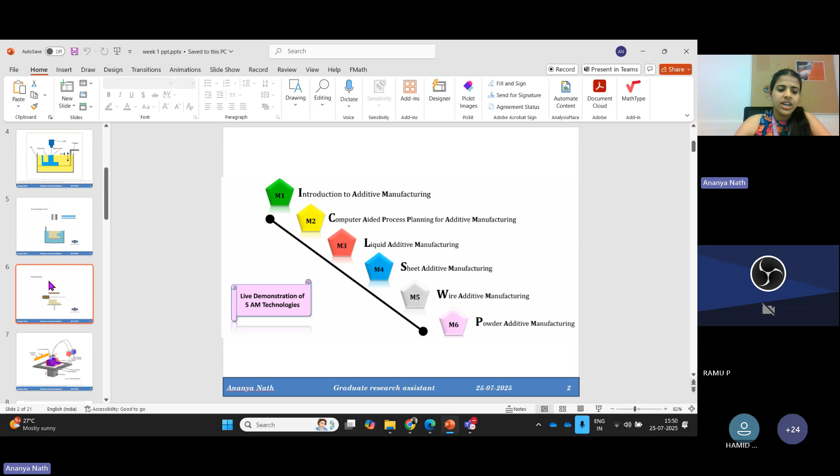The way these processes are arranged is based on the energy consumed by the process. That means vat photopolymerization takes the least energy, and directed energy deposition takes the highest energy.

Now comes the pre-processing part. Pre-processing means making the CAD model. But this doesn't mean you can just use a CAD software like CATIA, SolidWorks, or Fusion 360 to make the model and print it directly. It's never like that. If you want to use vat photopolymerization, you have to think from its own perspective. If you want to use powder bed fusion, you have to think from that perspective. So the CAD modeling approach also depends on these processes.

Because when we 3D print, we print on a base. It's basically like how birds make their own house. They find straw as raw material, bricks, dried leaves, and everything, and put it all together in a small part of a tree branch to make the house.

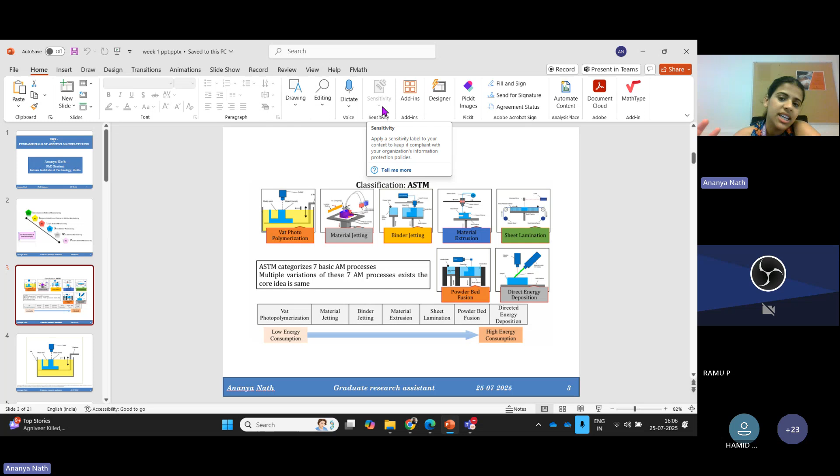Because these 7 different ASTM state-of-the-art processes have different applications, like material jetting, binder jetting, powder bed fusion, and material extrusion. Material jetting and material extrusion can both give you plastic parts. But if you compare the cost of the machines—just taking some constant for comparison—material jetting machines will be much, much higher costly than material extrusion machines.

And material jetting can also give you a very, very accurate part. I think material jetting is one of the top accuracy printing processes—no other additive manufacturing process can give you that level of surface finish. But you cannot go for material jetting for everything. This process is not capable of printing much in metal parts. Material jetting is not known for metal printing; it can print plastic only.

So if you have a very intricate geometry and a very critical application, you should go for material jetting. But if you have a plastic model which needs good accuracy, but its application is not that critical—it doesn't need few-nanometer accuracy or something—you should go for material extrusion. You can save half of the cost. So this is how it works.

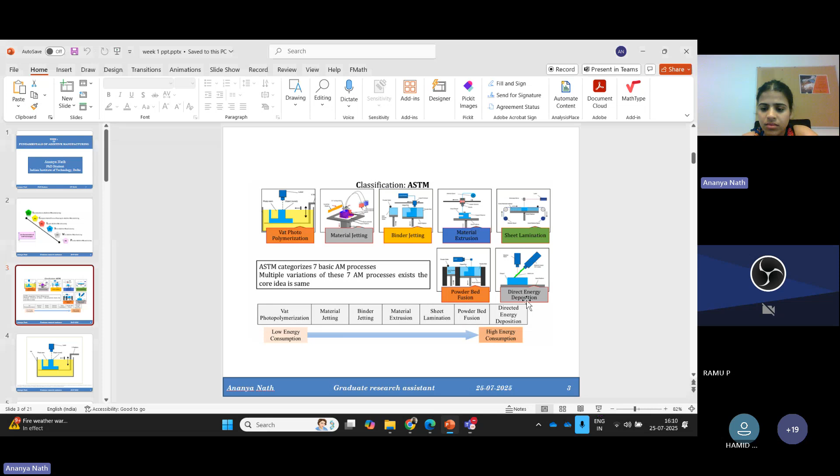So this is VAT photopolymerization. In this process, remember that every state of the art includes some sub-processes. The state of the art name is VAT photopolymerization, but under it there are multiple processes. For example, DLP, digital light processing, then there is SLA, stereolithography. There are other processes too which I don't remember right now, but under the state of the art of VAT photopolymerization there are different processes, and each uses different processing, but they all come under the same umbrella.

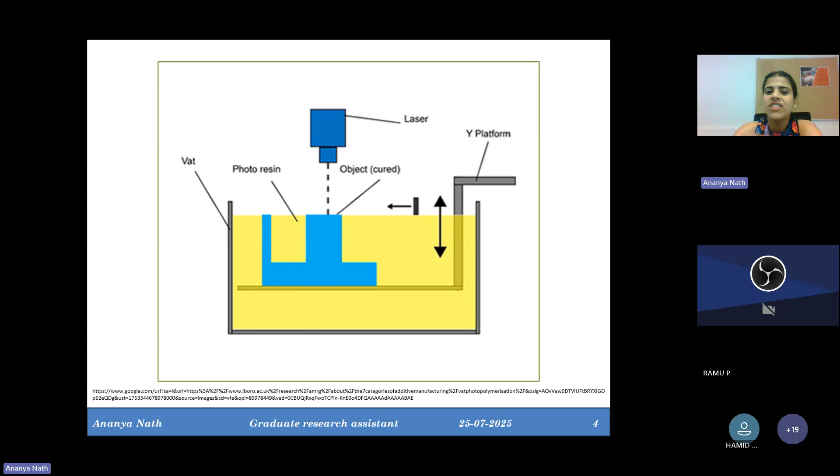In this photo, there is a build plate. On the build plate, this part has got made. This is the resin. So basically, if you see, this is an SLA process. This is a blade kind of thing, which is spreading the resin layer on top. And from here, the laser is coming. The laser, or the UV light, is basically curing the resin.

See, it went down. The build plate went down. The layer was spread. Now the light is coming to photopolymerize the resin present over there. So basically, when you put UV light on the photocurable resin, the monomers start reacting. They start making big chain polymers, and this is how the resin gets solidified. The resin is a thermoset polymer, so once it is solidified, it cannot be melted again.

So using this process, people use the physics of stereolithography to print resin parts. Now resin can be of different colors, and they will be cured at different wavelengths of UV. So this process can be done by laser or UV light. For laser it's different, for UV light it's different. For laser also, laser will have different wavelengths because it's light, and UV light will also have different wavelengths.

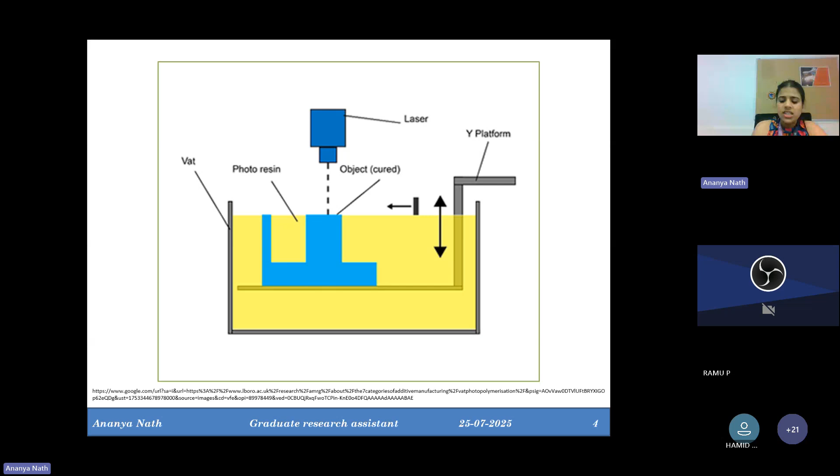Now this process can be reversible. The build plate can be mounted like this, and it can be dipped inside resin, like there is a vat of resin. This is also the same process, but there can be a vat of resin. The build plate can start curing from the bottom, so in that case the light will be given from the bottom. This UV light is put on the resin, and it will be solidified, this layer.

Then the build plate will move up by one layer. The resin will come, and the UV light will cure the resin present. Then the build plate again will move by one layer height, and the resin will be solidified like this. So when you get the build plate, the process is basically inverted upside down, but the product will be printed not upside down, in its original way only. So this is another process.

So SLA, DLP, these are different processes coming under the umbrella of VAT photopolymerization. This is used for plastic printing only. Previously it used to be used for thermosetting polymers like resins only, but these days people are trying to use thermoplastic polymers as well. Thermoplastic polymers mean when you're solidifying the polymer, you can remelt it and resolidify it again. So there comes a different process physics, but people are trying to use thermoplastics as well.

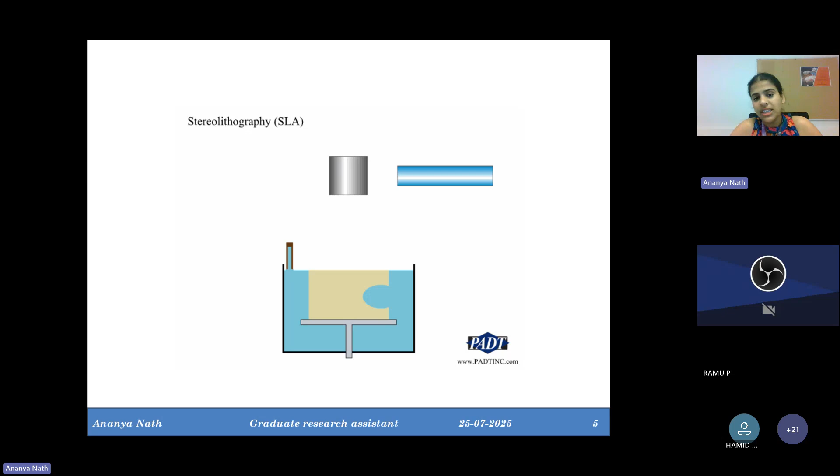Next process. If you have any doubt, you can raise your hand in between and ask. Do you have any doubt? No? Good. So this is another process which comes under VAT photopolymerization.

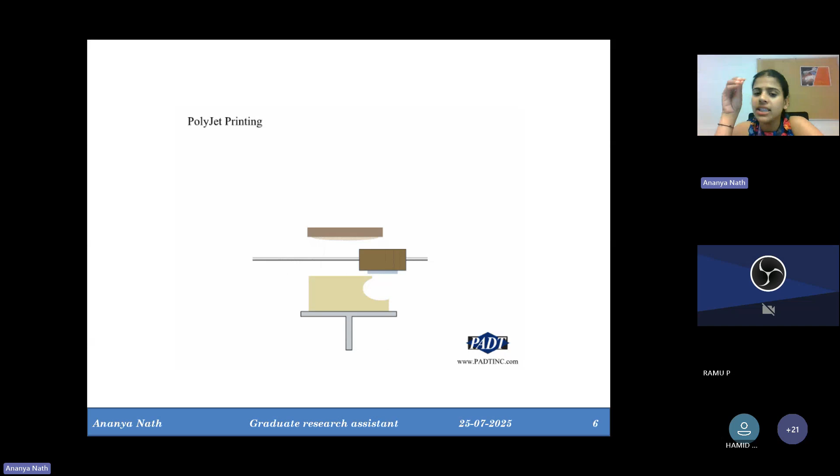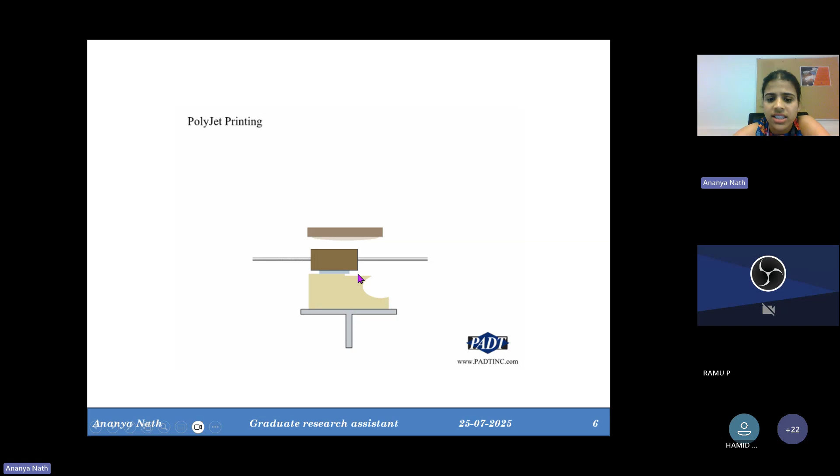This is polyjet printing. The head has some nozzles connected to the supplier, from which liquid resin comes. These nozzles spread the liquid onto the part, and from the top of the head there is UV light or laser light which cures this top layer of liquid resin.

In this process, the part is not dipped inside resin, so the washing process after printing will be a little bit easier.

Next comes material jetting process. So here I have shown— is somebody trying to talk? It's fine, it's fine. Okay, this is material jetting process.

Material jetting process also uses liquid material as raw material. It will be polymers again—mostly thermosetting polymers, but thermoplastic polymers as well. So both types of polymers you can use.

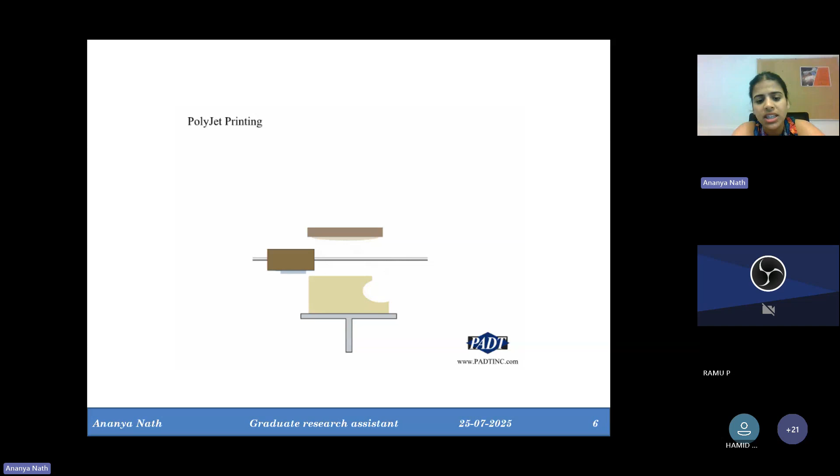This built material can be multiple colors. In VAT photopolymerization, if you're working with the polyjet technique, you can print multiple materials because there are multiple nozzles in the head. But if you're working with stereolithography, it's difficult to print multiple materials. So there comes material jetting.

It gives a great finish to the parts. It basically has a nozzle, and from the nozzle, drop by drop, the part material comes out and gets dropped on the build plate. Drop by drop, you fuse the liquid plastic droplets together and they make the track, they make the layer, they make the 3D geometry by layering. This is a very simple process.

You feed the material in liquid form only, and for each layer's solidification you can use a UV lamp. There is something called a leveling blade. So basically, after spreading one layer of liquid on top, you can level it with the blade so that your part will not be inclined in any part due to liquid surface tension and viscosity.

So this is the process. A UV lamp will be used to cure it, but not always—there can be a metal jetting process where the liquid gets solidified by itself, without any UV lamp, though you can use one as well. It depends upon the process, since under material jetting there are multiple processes, and also upon the raw material you are using.

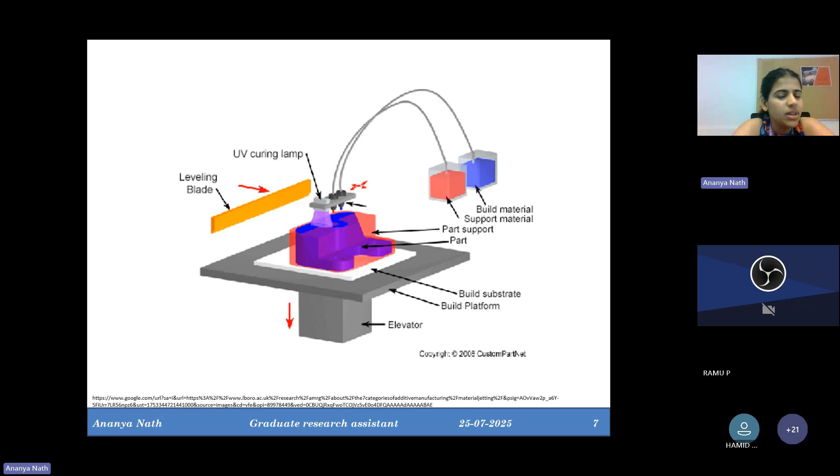So these are the things. If you are using a polymer build plate, there can be bonding of the layer at the polymer build plate. In that case, you have to cut the part after printing. So then it's better to use the metal build plate, so you can reuse the build plate again and again. It's not like one time use. So this is the process.

Then we have binder jetting. In material jetting, we are putting the material, and the material is coming out of the nozzle. In binder jetting, we use the roller.

We use powder as raw material, and a powder roller to put the powder on the build plate. So basically the powder, if this is my build plate, this is my powder roller. It can be roller, it can be blade as well. It will be used to spread the powder on the build plate. And from the nozzle, which will be on top of the build plate, the binder particles will come.

Binder can be liquid, so this liquid binder will come and put the droplet on the area where you are interested to print your part. When the liquid droplet is put on it, the powder particles will fuse together, and then you can put additional heat to it. You can again put the roller on it to just press the part again so that the adhesion will be better and the part density will be better. So this is the process of binder jetting.

Material jetting, then binder jetting, then comes the material extrusion. In material extrusion, one process is called FDM. You carefully look at this process.

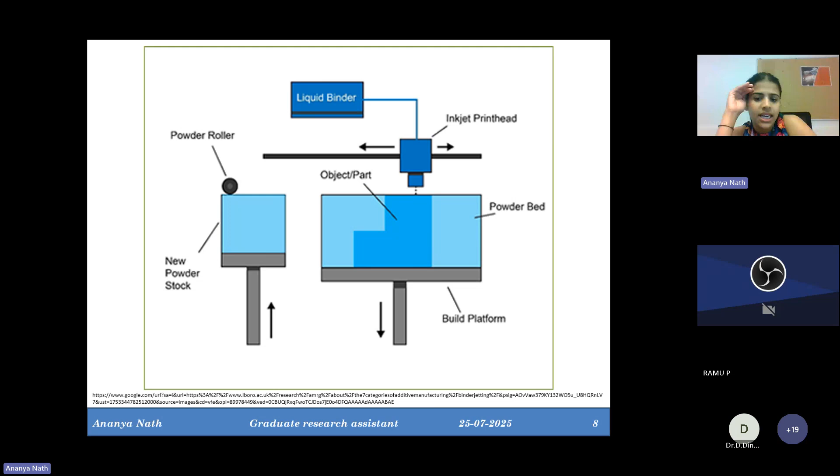So in the previous slide, and in this slide also, there is something called support material. Know what it is? When you make the 3D printed geometry, compared to casting, you make a mold in casting. And in the mold, you put the liquid metal. So wherever there is space, the liquid metal will try to flow inside and fill it. So that's the process.

In 3D printing, this is my build plate, and from the nozzle, material comes out and prints things. Now if I want to print this geometry, it has a lower curve, then a line, then an upper curve, then a small line. There is material in this part and no material in this part.

If I want to print it like this, don't you feel that when printing, there's supposed to be some material, otherwise this part will fall down? So if I'm printing this part on top of the build plate, obviously it will fall down if I don't put anything there.

Just like how bridges work. If you're putting a bridge on a road or over a river, you don't leave it unconnected. You put some columns in the bridge from the river as well, just to support the bridge. Otherwise, the bridge will fall.

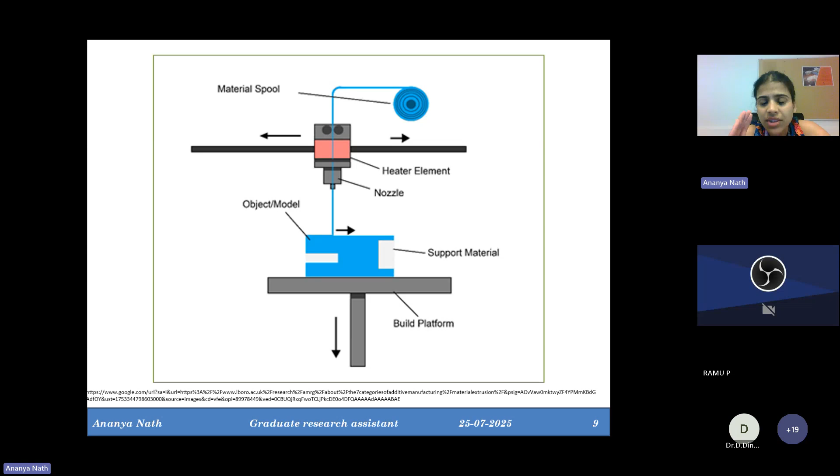Support structures are basically a waste of money, because ultimately you will remove the support, and when you do, you lose the money invested in the material, the time invested to print the support, and the energy invested to print it. So material, cost, print time—everything invested to print the support is lost, nothing else.

That's why support design is itself a whole study in additive manufacturing. But the basic concept of support is to give physical support to the overhang parts.

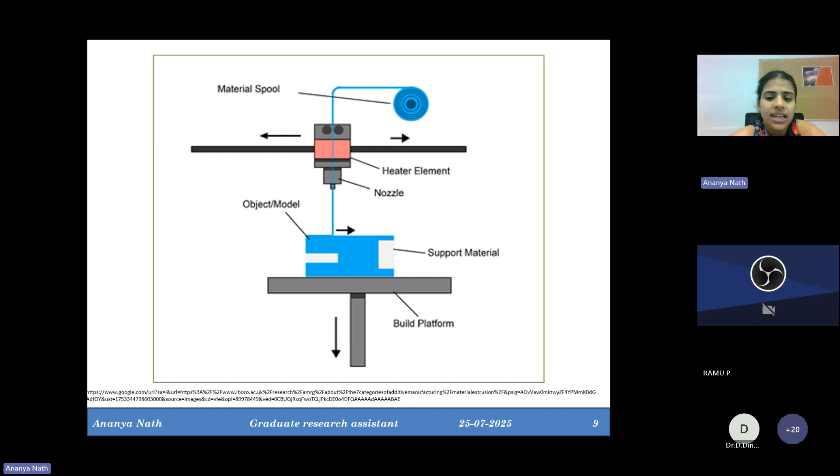In this video, if you remember, the part actually looks like this—I don't know what color it is—but this small portion is actually support. Maybe there's a big circular hole and on top of it I'll print the part again, that's why maybe somebody is putting support here.

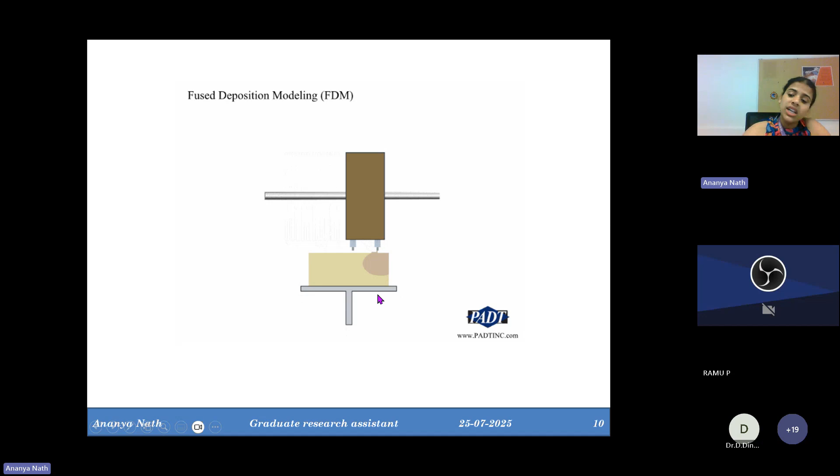Or it could be multi-material deposition as well. I think it's multi-material deposition, not support, because if it were a support, I could have just put these types of columns as support instead of fully dense material, since it would be very difficult to remove dense material. So we don't fill the entire overhanging portion.

We just put some stands below the overhang portion so that it will withstand its load. We don't put the whole solid body below it, just stands like this. This is a support structure because we have to remove it afterward. It's the removed part, so it will include some extra cost.

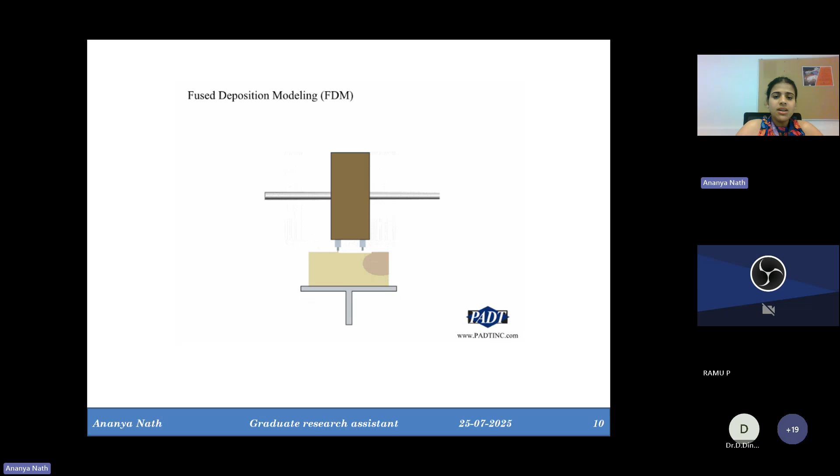So that was the material extrusion process. Next comes the sheet lamination process. Sheet lamination is a process used for prototyping only, not much used for real part production. These days, I think nobody uses it. It was very well known previously because it was very good for prototyping.

So you can use a sheet of paper. This is a roller, for example, where all the paper is rolled. There's a long paper rolled into the roller. The paper comes from here to here, and gets rolled into another roll. One end is rolled here, and the rest of the paper is rolled here. So the paper will come like this.

There will be a cutter, typically a very sharp-edged knife. The knife will cut the paper in such a way that that cut portion will itself be a layer of your material or part to be printed.

Then comes the energy source. If you are printing some wooden part, wooden sheets can also be used, and in that case some laser light or energy source is used to join the wooden parts. Otherwise, if you're printing papers, they just put a heated roller onto it. This is the heated roller. It will roll onto the paper and the paper will be fused with the previous paper cut.

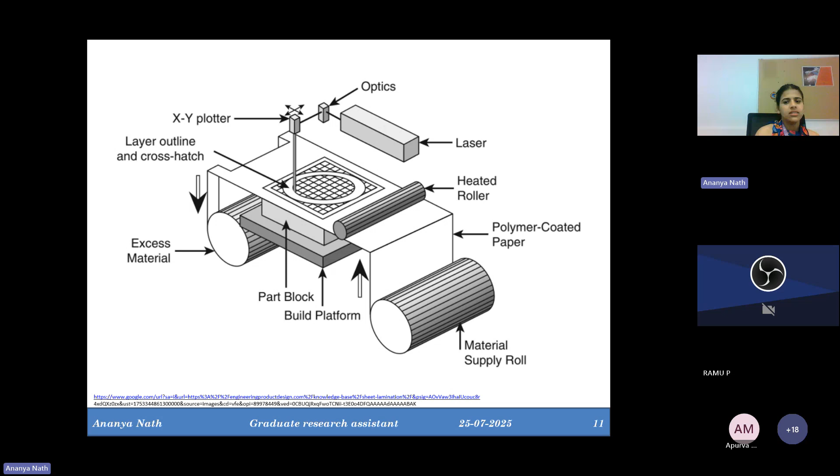How you define the layer is basically by using a knife to cut - not you, the machine uses a knife to cut the geometry in the paper. So this is how it works. Now, for cutting, you can also use a laser if you are working with wood or something similar. For paper, a knife is enough.

Then comes directed energy deposition, also known as DED. Actually powder bed fusion should come first, then directed energy deposition, but it's okay. Directed energy deposition uses metal - you can't use any polymer in the DED process. DED cannot print polymer; it is only used for metal.

The DED process can use both powder and wire forms of material - it can deal with both forms. Since we are using metal, your normal laser or UV light or heated roller, or any kind of light source we've seen till now like heated coils, will not be useful for metals. For example, aluminium has a melting point of at least 660 degrees centigrade, so obviously a heated roller or UV light will not help.

You need a high power laser beam. Laser has its own physics, its own introduction and big chapters - I'm not going into that, but if you have any doubt you can ask me anytime. The laser is basically a light source with very, very high energy, which can cut a human being into two halves, basically. That high power laser is what we use.

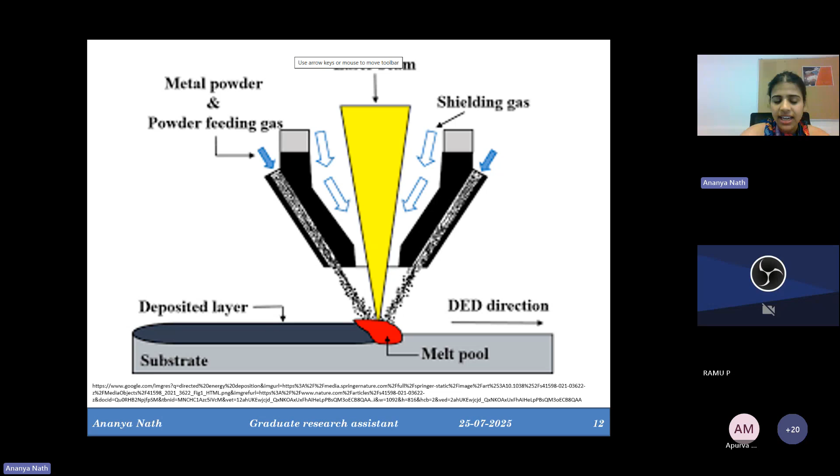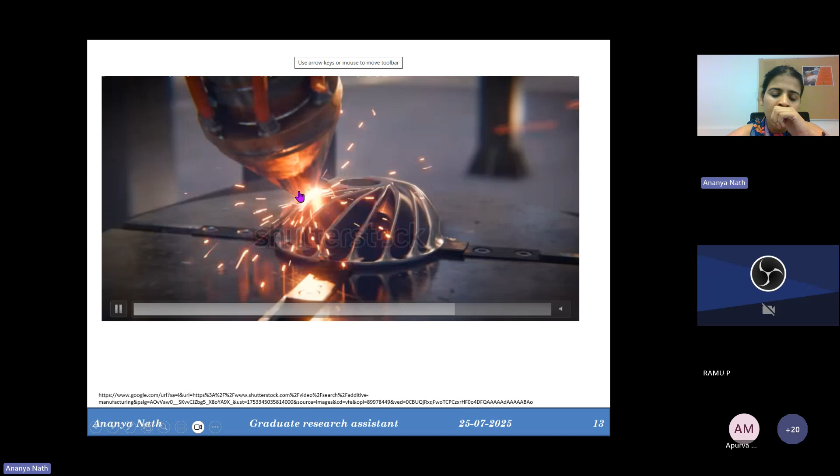If it's not clear, I can explain again. The substrate should be metallic as well, and this is how it works. So you see from the nozzle, the laser comes centrally, and circumferentially the powder comes in. They both meet at a point, the material gets melted and deposited. This is how they make a turbine blade kind of part, a metal part.

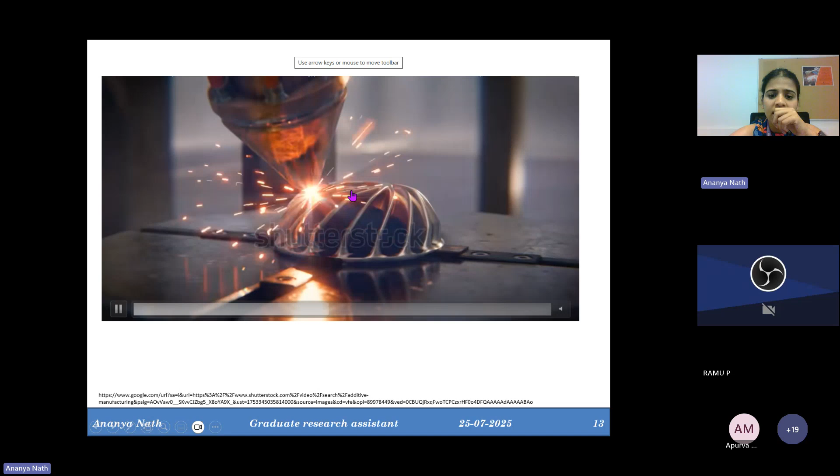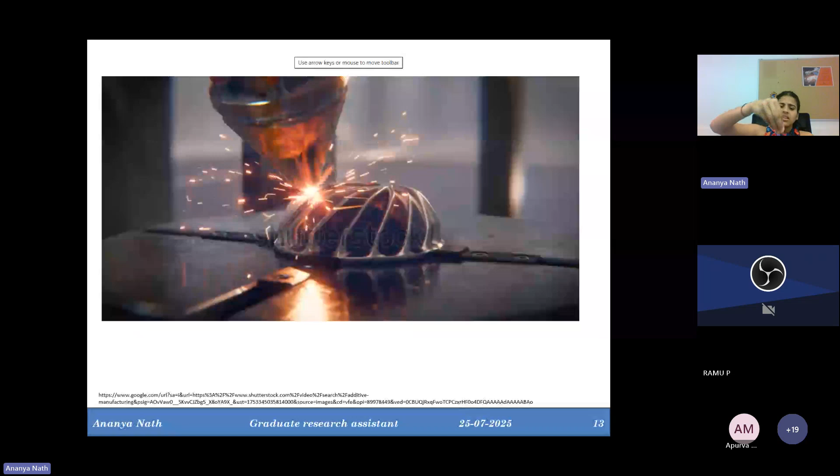If you have a nozzle mounted on a robotic arm instead of CNC, and your build plate is also mounted on a robotic arm, then it can have more than 3 degrees of freedom. If it can move like this, then for a part like this, you can simply print like this. You don't have to print in a way that requires support. You can just print like this without any support. So if you have more than 3 degrees of freedom, you can start avoiding support.

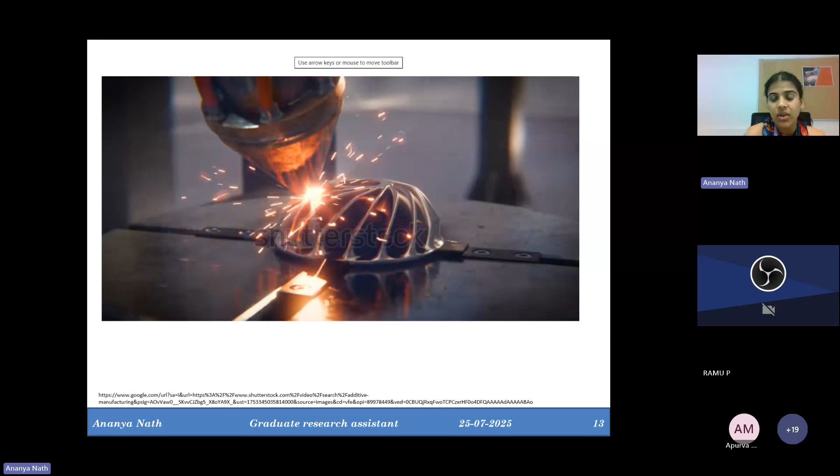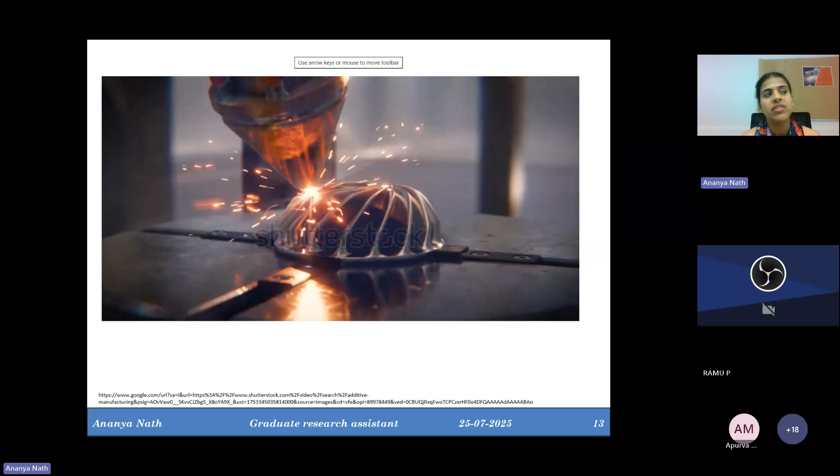Mark the words, you can start avoiding support. You cannot avoid all the supports, but if you have 5 degrees of freedom, you can have supportless printing because it's rotating and moving. This is how people previously used to print in 3-axis degree of freedom CNC, so they had to have support, but using this robotic arm, you can have printing without support as well.

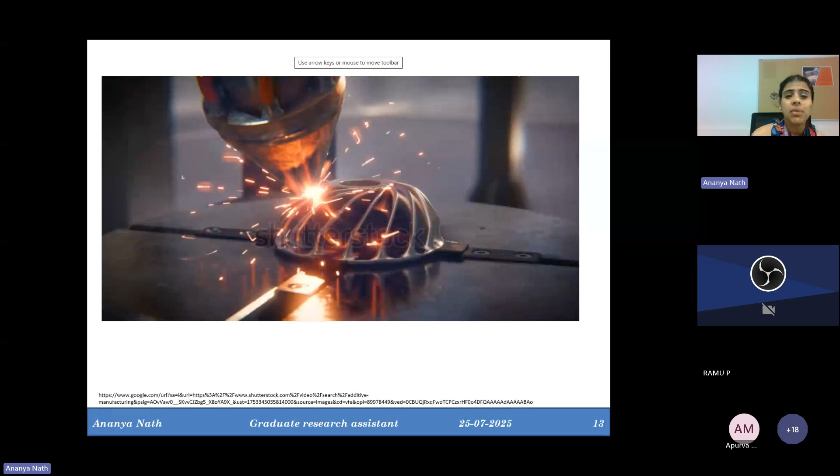But some processes like vat photopolymerization deal with liquid resin, so they can't have more than 3 degrees of freedom. That's why supportless printing in those cases is quite difficult.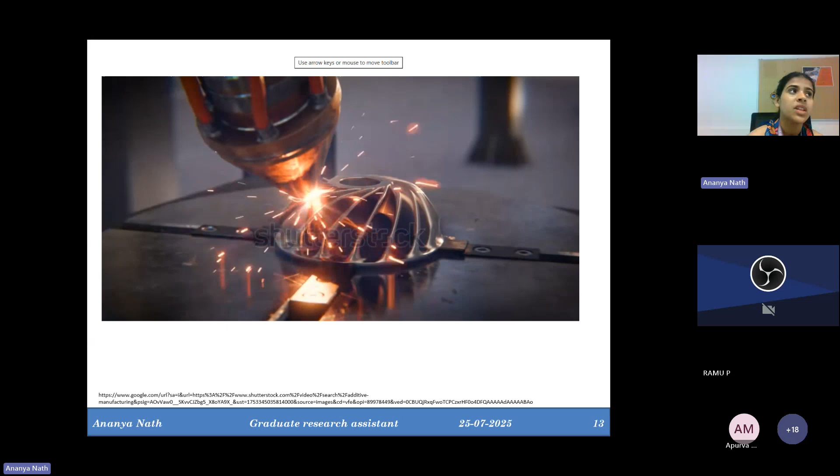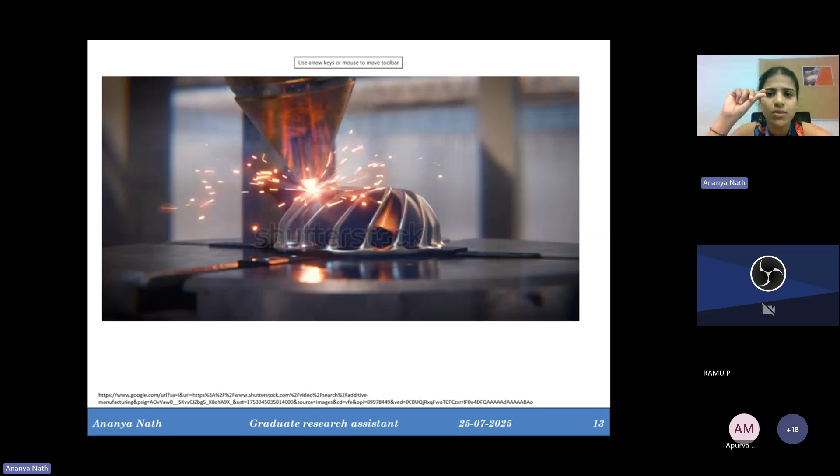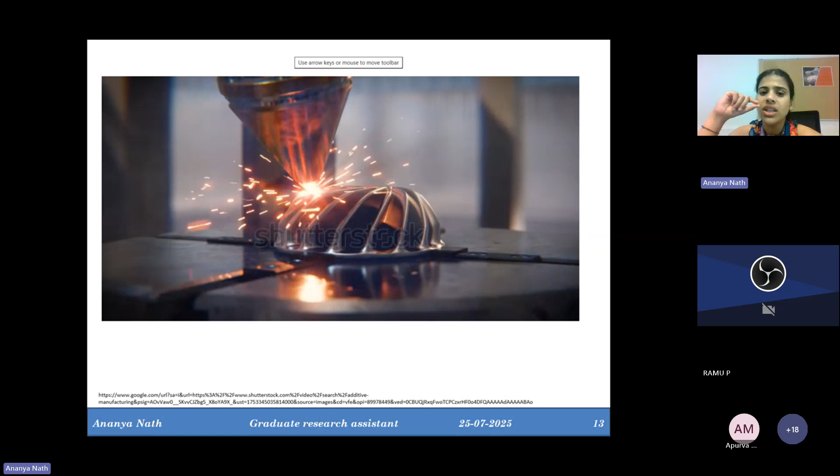Then comes material jetting, which also has a liquid part coming onto it, so it's not possible there either. In binder jetting, you're spreading powder, and the layer thickness will be in micrometers, maybe 30, 40, 60, or 100 micrometers. Our human hair thickness is 100 micrometers, and you can get a layer thickness less than that. So it's not possible to have more than 3 degrees of freedom in all cases, but wherever it is possible, people use it.

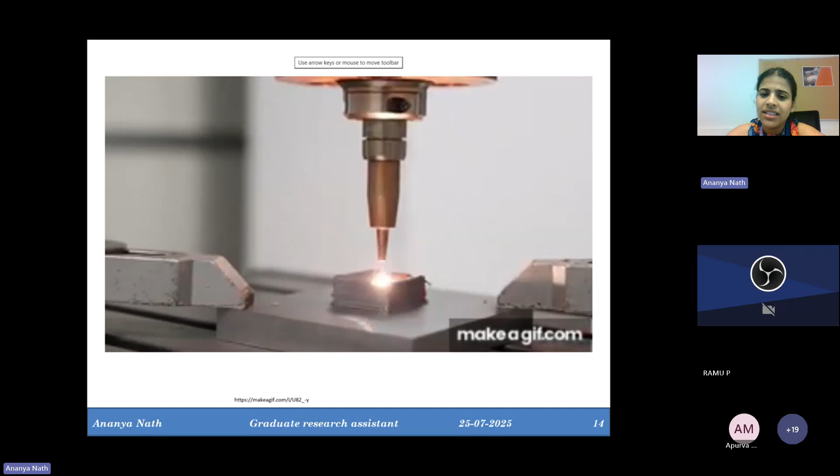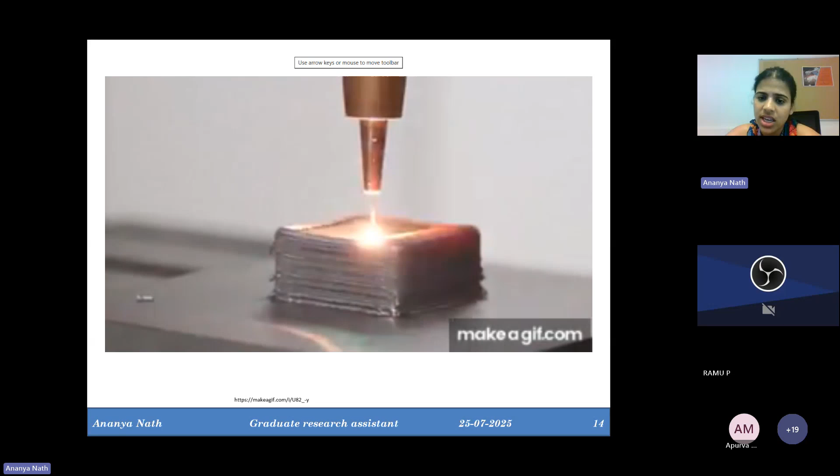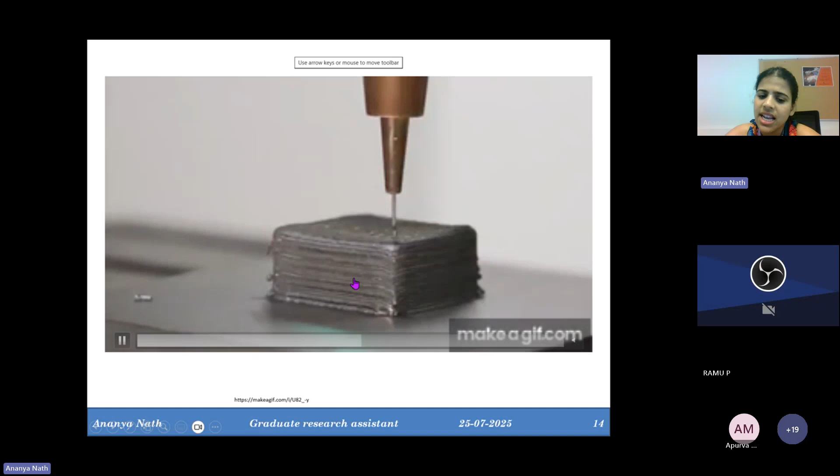There comes another process. As a raw material, I said we can use powder and wire as well, so this is wire-based deposition. You see from the nozzle end, the wire is coming, and somehow it's generating energy shown as this bright light, and it's printing the part like this, layer by layer, because you can clearly see the layers.

How it works: basically in DED, the raw material can be in powder or wire form, but the energy source can also be arc or plasma instead of laser. So laser, arc, plasma are the options you can have in DED. Plasma is also an energy source, you can read about it. Arc, we all know - if you're from mechanical engineering, you know about arc welding, MIG and TIG.

Tungsten inert gas welding will not have a consumable electrode, but metal inert gas arc welding will have a consumable electrode. Now think about it - instead of just doing a T joint, if you start depositing that metal consumable electrode onto the build plate layer by layer, you can get a 3D part. So this is how additive manufacturing actually came from spray or coating techniques and welding techniques. This is how it works.

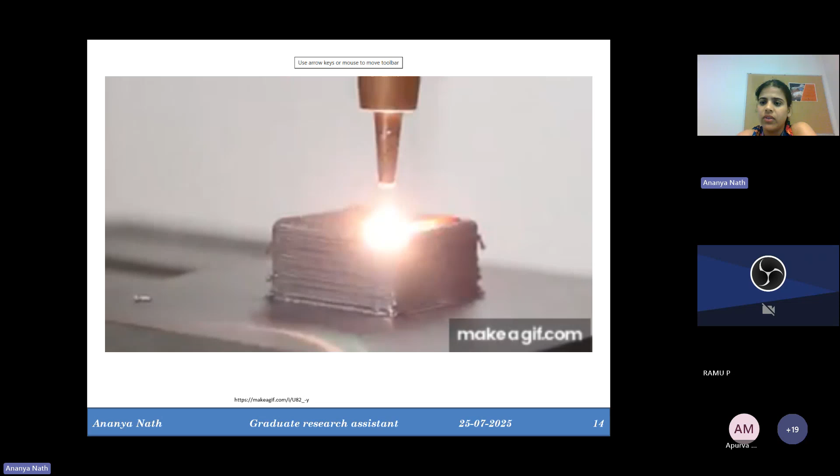DED can include powder and wire, both forms of raw material, and it uses multiple sources of energy. Next comes powder bed fusion. According to me, this is the most tricky process along with DED as well because it has a very fine powder distribution. DED uses powder distribution from 45 to 105 micrometers, like the metal powder you are using. But in LPBF, or powder bed fusion, we use 15 to 53 micrometer powder, much lesser.

There will be a roller or a blade kind of tool which will spread this powder in 30-40 micrometer layer thickness onto the build plate. This build plate is connected to a lead screw or CNC mechanism. The build plate comes down, moves down by each layer thickness. The roller spreads the powder like in binder jetting, and instead of binders, you are putting energy into it. So that's how these two state of the arts are different. In binder jetting, you're just putting binders.

You can do polymers. But in LPBF, your process physics is itself different. You're melting the metal powders. Melting the powders means you're changing the property, the metallurgical property of the material.

The laser will basically scan or move very fast on the build plate, where the powder is spread only at the position where the part needs to be printed. The other part will remain in powder form only. And like that, each layer will be spread and the laser will only move in the portion where the part needs to be printed. So after the part has been printed, you can simply remove all the powder from around and get the part.

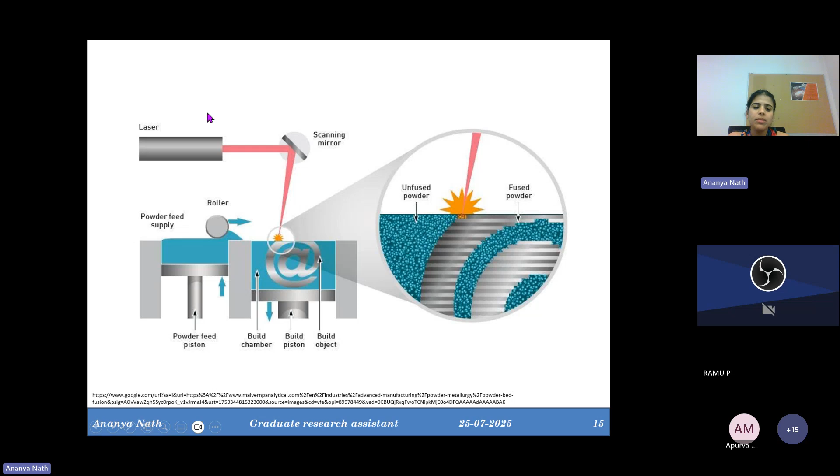If you see this video, this is how LPBF works. You see, this roller is spreading one layer of powder, this blue is the powder, and excess powder is collected in the bed. Now the laser is coming, scanning, melting and fusing it. And like this, the roller again spreads the powder, and the laser again comes and melts the metal to make the part.

Now think about this geometry. This geometry doesn't have any support. It's supposed to have a support, but I don't know why in this video it has shown there is no support. Let's take this example.

In this geometry, in this area very close to this wall, there can be some fused powder particles sitting on the surface of the part because of the heat, which you can consider as fused powder. In this part, the powders are already melted and solidified, so you can't distinguish the powder. And in the blue part, in other areas, these are all unfused loose powders, which you can brush away after the process and get the part.

Is it clear? Yes, ma'am, got it, thank you.

So this is how LPBF works. That's why I said understanding LPBF is a little tricky compared to other processes, because it's very unrealistic to think that it's possible to spread a 30 micron thickness layer of powder.

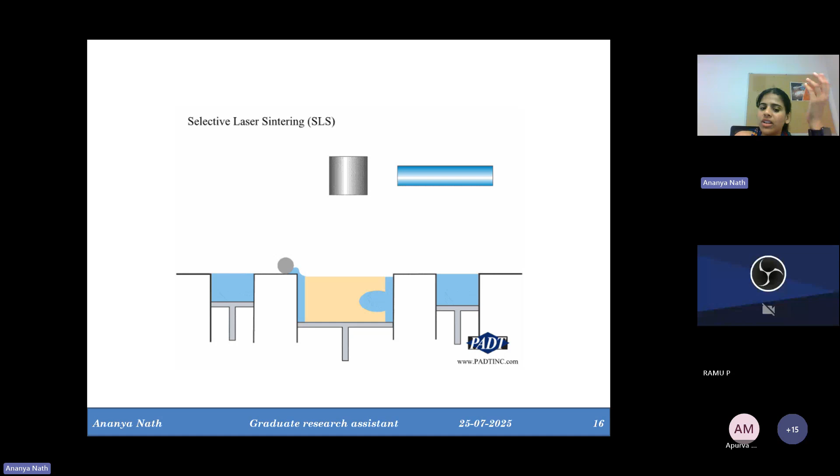When I got to know about the process a few years back, I was shocked that it's possible to spread a 30 micron layer thickness of powder, because our human hair is about 100 micron thick, so 30 microns is still very shocking to have as a layer thickness spread over the build plate.

So it's a bit difficult to understand, but when you see the process, you understand better. You can just search on YouTube and see the real processing videos there.

So that's all about the 7 different types of additive manufacturing. If you have more doubts, you can ask now, or if you have doubts afterward, you can note down the point and ask me in the next class.

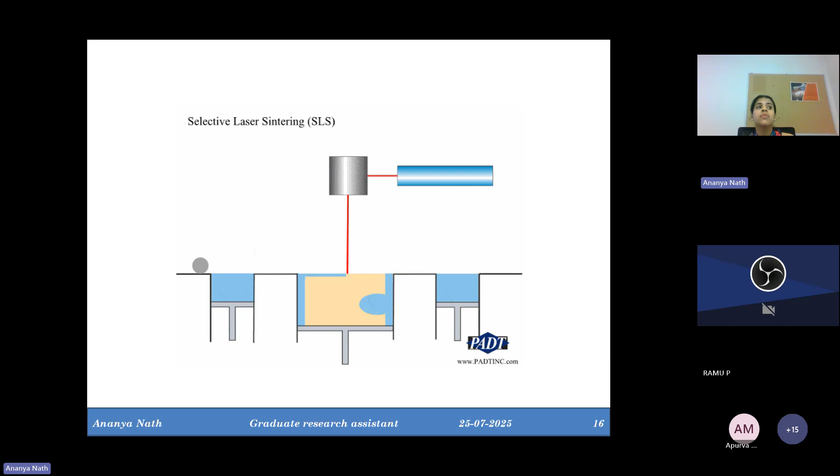So these are the 7 processes. Now why people are joining after 1.5 hours, I don't know.

So now we can start seeing the previous year questions. And if you have any idea about additive manufacturing, or you have watched the videos of week 0 or the preliminary one, or anything else, you can just try answering the questions.

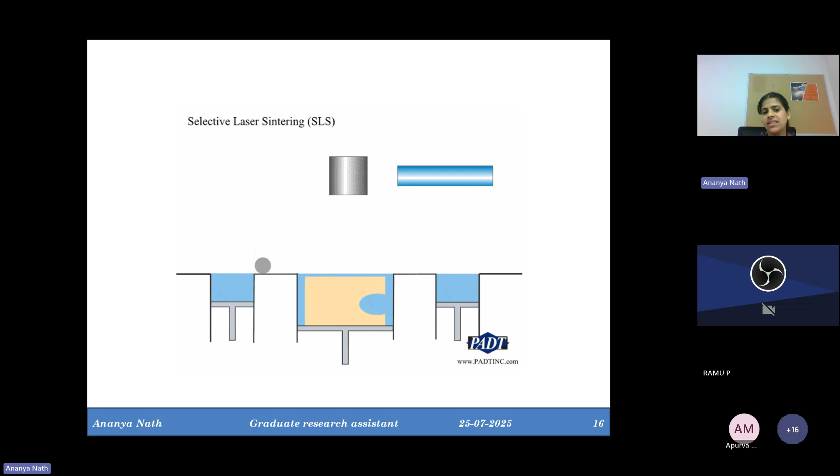If you know the answer, just unmute yourself and tell me. LOM stands for laser object manufacturing, light object manufacturing, laminated object manufacturing, or locomotive object manufacturing. Anybody? Ma'am says laminated object manufacturing. That's correct. It's basically a sheet lamination process.

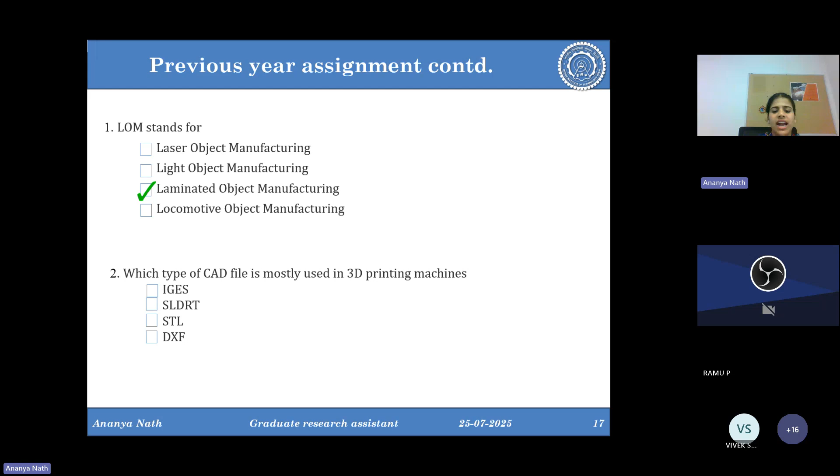Which type of CAD file is mostly used in 3D printing machines? STL. Yes, it's STL, the CAD file format. So basically the CAD file has to be saved in STL to go for the next process, which is slicing.

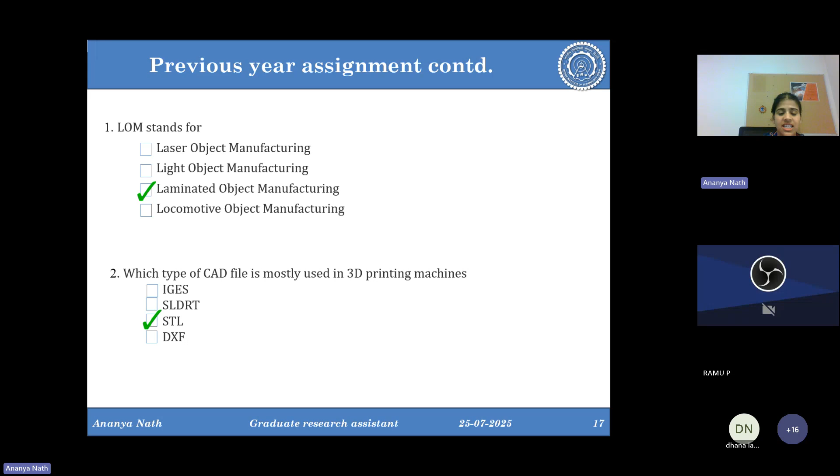SLA stands for stereolithographic apparatus, yes. Stereolithographic apparatus, or just stereolithography.

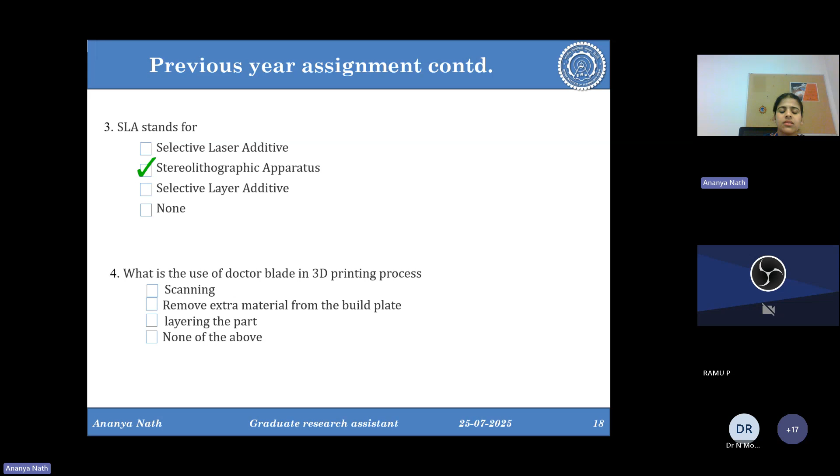What is the use of doctor blade in 3D printing? Remove extra material from the build plate, that's one answer. The second answer is layering. So doctor blade is used for removal of extra material from the build plate, but it's also used for the layering of the part. The blade you've seen in my videos and photos is also called the doctor blade. So basically as a recoater in LPBF, the blade which is used to spread the powder is also called the recoater. The recoater can be a blade, a brush, or a roller, but some people and some machines call it doctor blade as well. So this can have both uses.

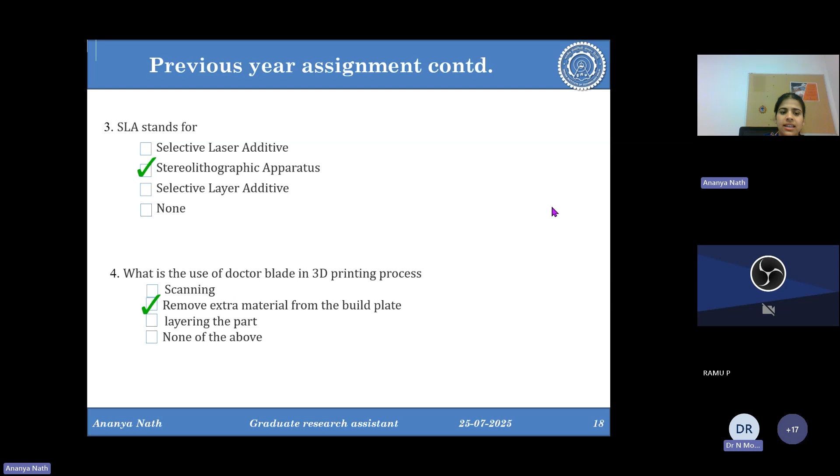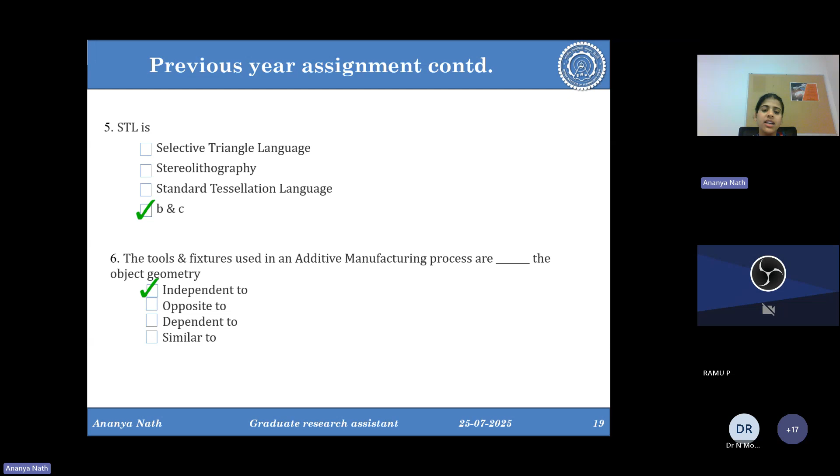The tools and fixtures used in additive manufacturing process are dash the object geometry - independent. It's independent of the object geometry, because when you're talking about the doctor blade, the recoater, the heating coil, or the heating blade, these are independent of the object geometry, obviously. But if you're talking about some fixture in additive manufacturing, very few, like making a fixture to fix the part in it, it can be dependent as well, but mostly it's independent of the object geometry.

Your whole material is wasted, so you have to identify first where the support is required. Then you put the support there, and then you finally save the file for printing. In the slicing step, we put the support, but the identification of the support we do in the pre-processing step, which is the CAD modeling preparation.

Also, I forgot to mention, it's not that you always need the support. If you want to print this part like this, you need a big void which needs support. But if you just print the part like this, you don't need the support, right? Because this will not have that much overhang. So you can minimize the use of support depending upon your application and requirement, and you can orient the part like this so that you need the least amount of support.

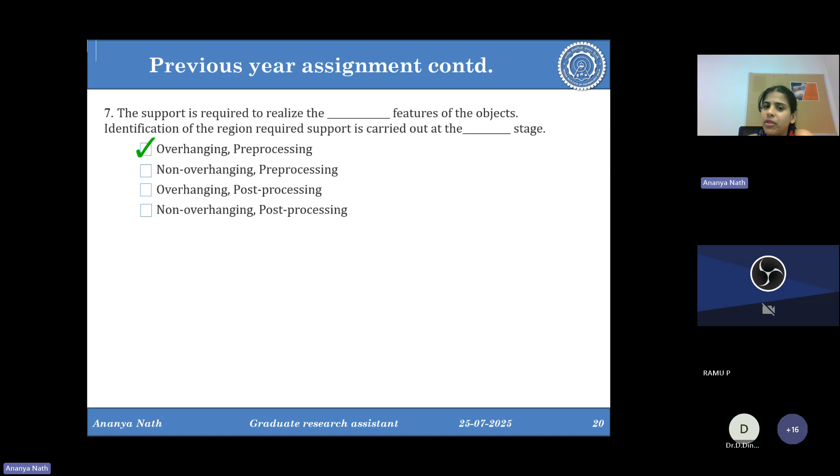This is how you should optimize your process and your part printing. It's not a very simple thing — even building or forming the CAD geometry is not simple. Orienting the part on the build plate is not simple, selecting the part parameters is not simple, and selecting the support structure is not simple. That's why you need to go deep into this topic and think it through before doing it or advising somebody on how to print their part.

Because points can be collinear or non-collinear. Collinear means the points lie on the same line; non-collinear means they do not lie on the same line. So when three points are not on the same line, they are non-collinear points, and these can form a triangle.

So when your three points are not in the same line, that is non-collinear, and these three non-collinear points can make only one surface, which is called a triangle. Basically, a triangle is the geometry that can cover a full surface using only three vertices and three sides — it needs the least amount of lines to make a surface. Two points make a line, but three non-collinear points make a surface, which is a triangle.

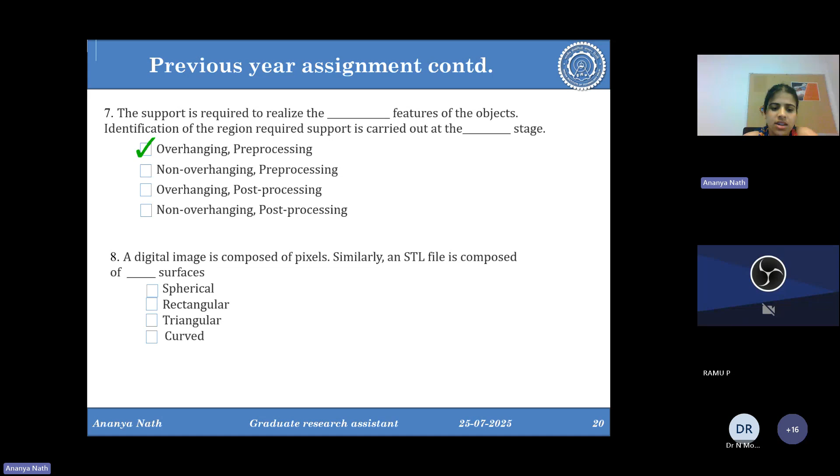And STL is essentially covering a full surface using a geometry, and the triangle is the smallest geometry you can use to cover that surface. That's why triangles are used, and to make a triangle you need three non-collinear points. That's about it.